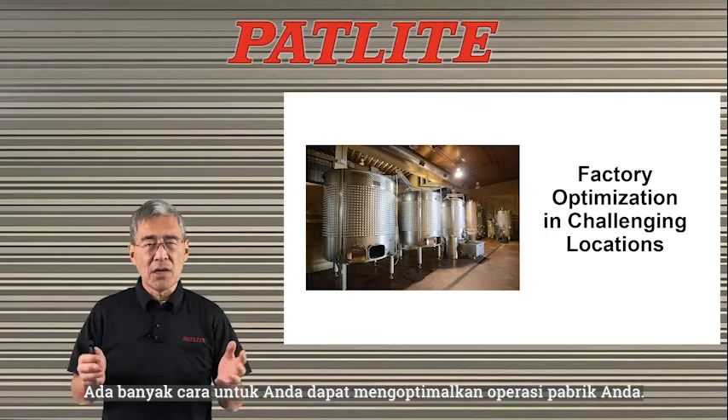There are many ways that you could optimize your factory operations. Today I'd like to talk to you about one feature of our LA6 PoE Ethernet capable multicolored LED signal tower to help you achieve this.

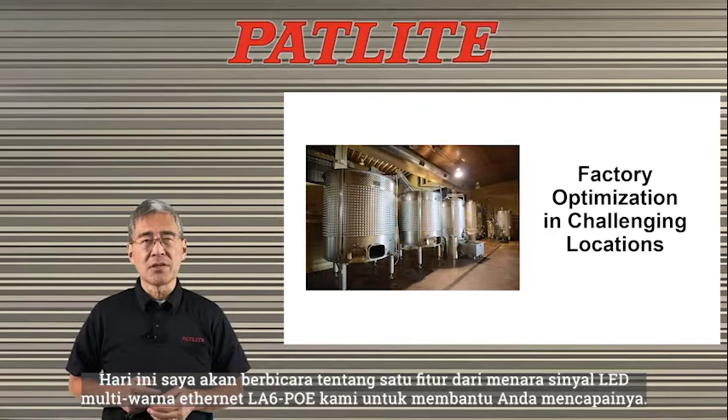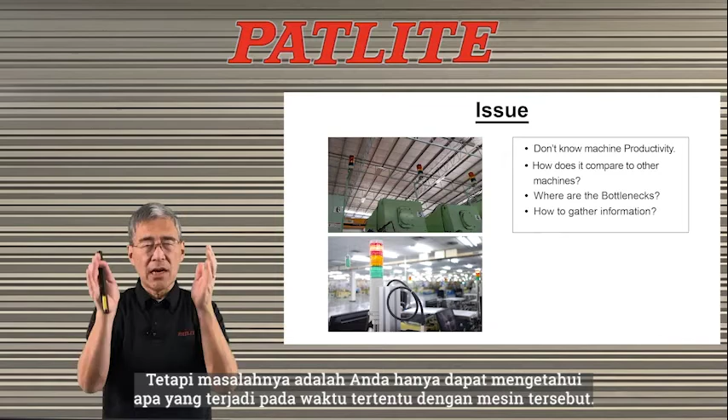Many machines in factories already have signal towers installed on them, but the problem with that is that you could only tell what's going on at that particular time with that particular machine. You may not know how that particular machine is doing compared to another machine, or how your process is flowing overall. Maybe there's bottlenecks here or bottlenecks there.

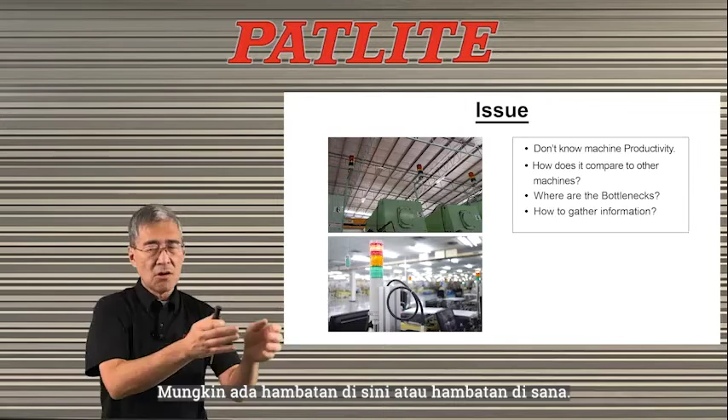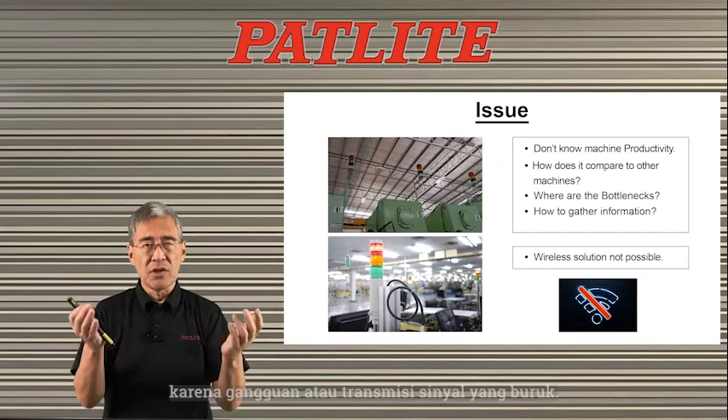Maybe you've tried to use Patlite's wireless solution to gather this kind of information, but you found that you're not able to do that because of interference or bad signal transmission. We'd like to propose installing our LA6 PoE signal tower onto your machines.

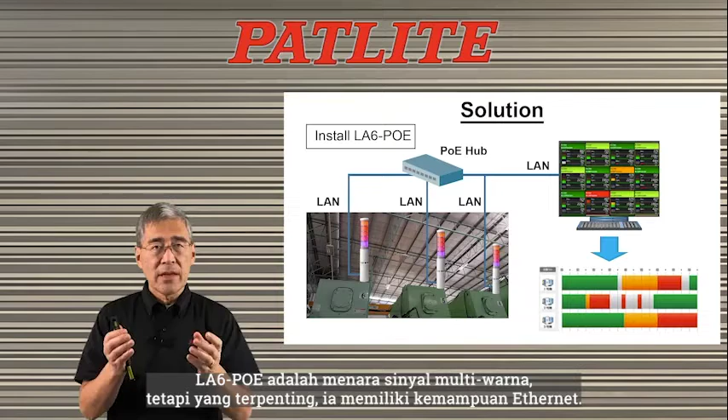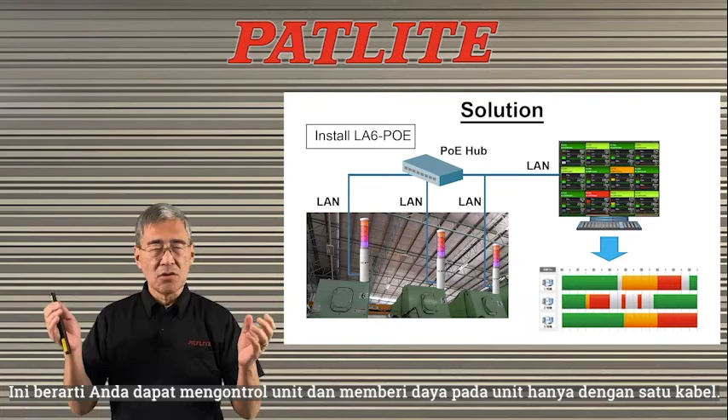The LA6 PoE is a multicolor signal tower, but most importantly, it has an Ethernet capability. With that, you could put it on your network, and in addition to that, it has PoE, Power over Ethernet. So that means that you could control the unit and power the unit with one cable. There's no need for extra wires to power the unit.

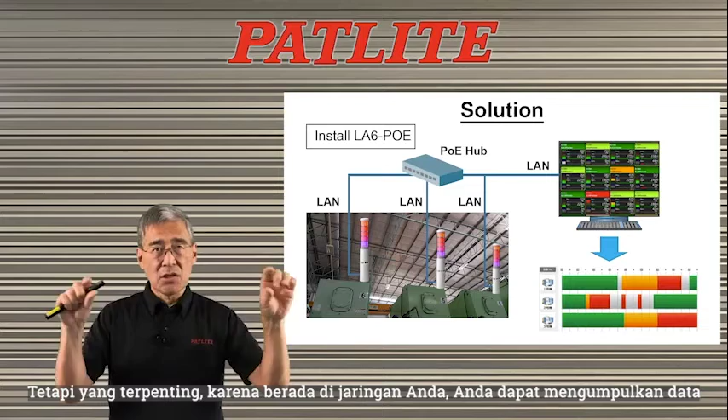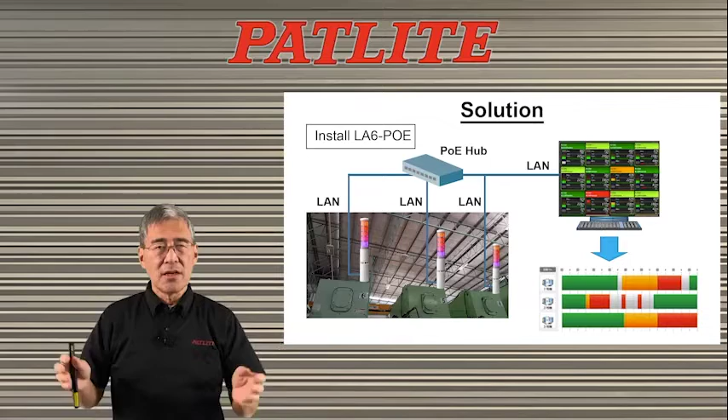But most importantly, because it is on a network, you could gather data from each machine that is connected to this LA6 PoE, and create andon charts and Gantt charts. This way you'll be able to analyze how each machine is doing, how your overall process is going, and you can improve your overall productivity.

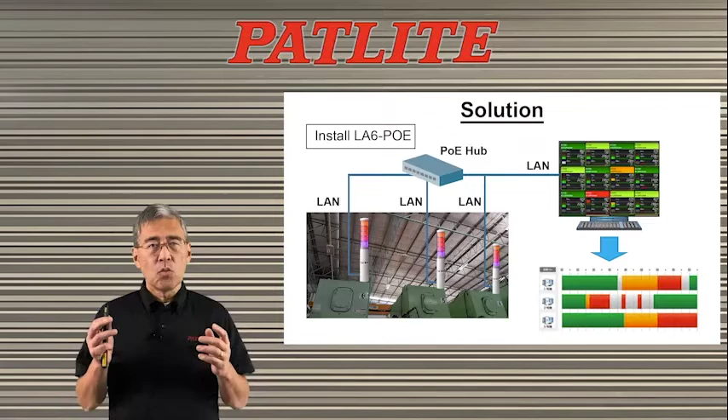We have two LA6 PoE models. One is a desktop model and the other one is a direct mount model. They both have Ethernet capability, so you could put them anywhere on your network. They both have Power over Ethernet PoE, so you don't need to have extra wires to power the unit. So with one cable, you could control the unit and power the unit.

The 21 different programmable colors and the 11 different alarms allow you a lot of flexibility to suit your needs. And finally, we have the different protocols, Modbus TCP/IP and HTTP.